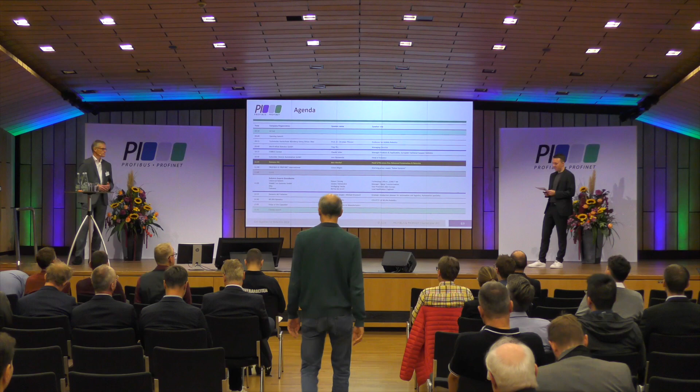Hi. Hi. Here you go.

I'll give you a bit of an overview about the company, about where we are located, which are doing stuff with robotics, doing automation with robotics, integrating that, and then showing you some examples on our product range and also about new possibilities on integration.

So that's basically digital industries, one of the three pillars from Siemens, and it's separated into different business units, such as software, where you also find robotic parts - Tecnomatix, Process Simulate, Plant Simulation. They have a lot to do with robotics, and I think they're quite known to you as well.

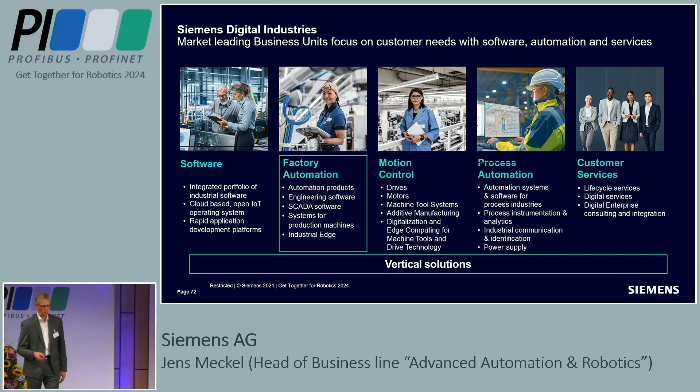So this is an overview about the company, and now I'm digging really deep into my business line. It's a very small business line within factory automation, handling Advanced Automation and Robotics. Our mission is really to make industrial robots smarter and easy to use as an integral part of Siemens technology.

And when I'm saying Siemens technology, that's really meant as connecting to our SIMATIC, the really well-known automation system. Here we see SRCI really as the bridge between the automation, between SIMATIC and robotics. And what our main focus is really tackling the OT customer.

We heard a lot of IT integration changes happening there. Yes, there are a lot of changes, but out there's a huge operation and technology world, and this is what our aim is to address.

As Max said before, my background lies a lot in TIA Portal, and there we have roughly around 200,000 customers using TIA Portal worldwide, and we have millions of machines out there running on TIA Portal based on SIMATIC. That's why, for me, it's a natural step to see how we can leverage that potential we have and make it available also for all the robotics users. This is why I also stated here, integration and of course ease of use is the key.

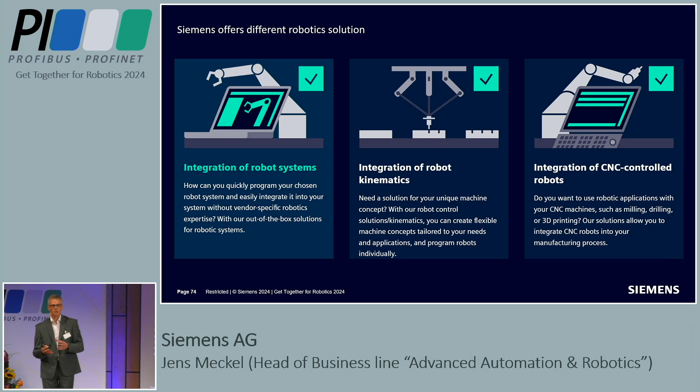So here we're very, very open - we can connect all robot manufacturers using the SRCI interface, and this is really the ease of use for our OT guys. That's why it's so important for us as Siemens to have the robot library, to have the possibility to do the programming and robot movement from within the TIA Portal, and then use the standard robot command interface to connect to the different robots and robot vendors.

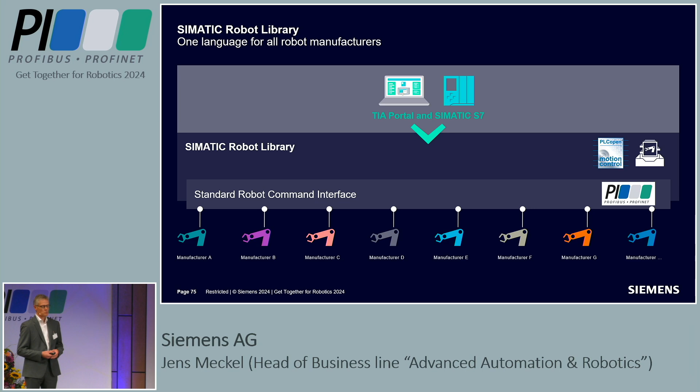And we are increasing the amount of possibilities we have there. First of all, this is the general workflow coming from the TIA Portal with the robot library. You have your predefined HMI screen, which makes it also very easy for our customers to use. And you have your program with the robot library, then you connect via SRCI to the robot.

And not only to the robot - now, released this summer, we also have a simulator which can be plugged into the SRCI interface. And then you can really use the robot simulator to simulate what you've done on the PLC.

You can connect to our virtual PLC, the PLC simulation, PLC Sim Advanced, and then you can really test your program to see if it's running. You can try that without the need of a dedicated simulator from a robot vendor, because here you can connect directly to PLC Sim Advanced, making it easy.

So that is regarding our SRCI portfolio, around the SRCI portfolio.

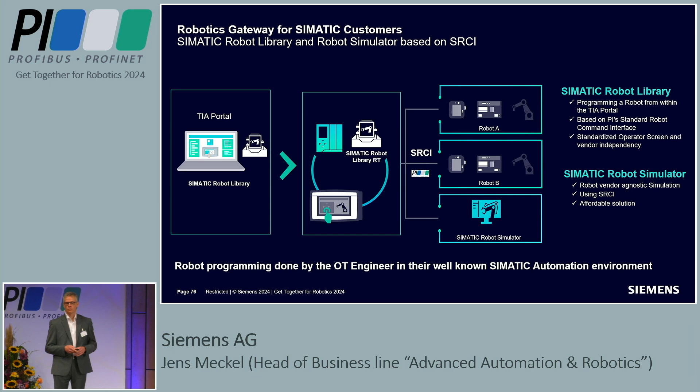But we heard a lot of topics regarding AI-based robotics, and we as Siemens also do a lot of AI-related topics, one of which is in the field of robotics. This comes close to what Ying-Wu showed before from MechMind. We do different kinds of AI-based algorithms in data analytics and things like that, and I will show a system later on, but also in robotics.

In robotics, we were looking for a niche where we could really apply those generic AI algorithms. As you showed before in your presentation, it's bin-to-bin picking of unknown objects. This is a very hard task for robotics, but we have a very good algorithm here, and it's a released product you can deploy, which provides you the pick coordinates.

We will continue within that niche, and what we currently have in development is the so-called Pick AI Pro. We also pick unknown objects, so no training needed, but we'll also have the possibility to do conveyor induction and depalletizing tasks. What we do there is really play in a niche with these kinds of tools - we do not want to disturb the whole market with Siemens coming up with a huge AI-based robotic portfolio. This is for dedicated use cases, and we're really focusing here on intralogistics.

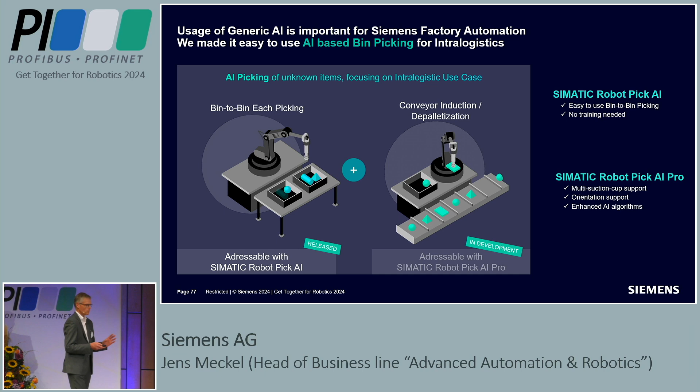Apart from those topics based in my business line, we also came up as Siemens with an industrial edge ecosystem. This is something I really want to show you because from my perspective, it's a huge possibility. Remembering yesterday's presentations about the need of ecosystems, partnering, and collaboration, with our industrial edge ecosystem, this is really what we offer to the market. We want the idea of this to be very open.

So we have customers on the right-hand side, like industrial manufacturers, industrial machine builders, OEMs, and the ecosystem consists of partners. We need application providers because we are not the experts in, for example, optimizing certain process variables of wood cutting machines or things like that. There are application providers and solution providers who have this kind of knowledge.

And for them, we provide the environment, we provide the industrial edge platform to host those kind of applications, to do the marketplace, because it's not easy to install a marketplace in several countries. If you do the cloud-based, you have terms and conditions, it's a real pain, and it's great if somebody takes care of that. And we are the one doing that, and we really offer that to the market, to basically everybody on the market, also on the device builder side.

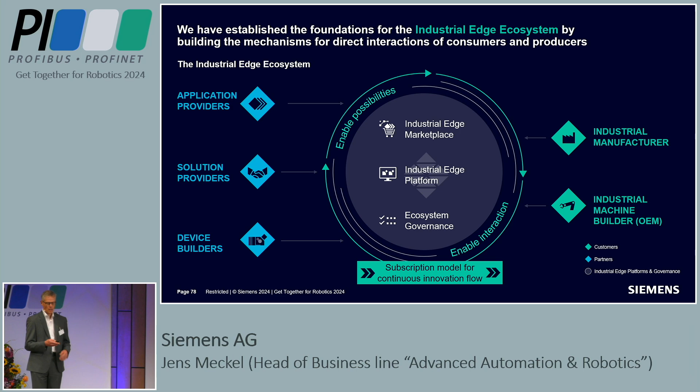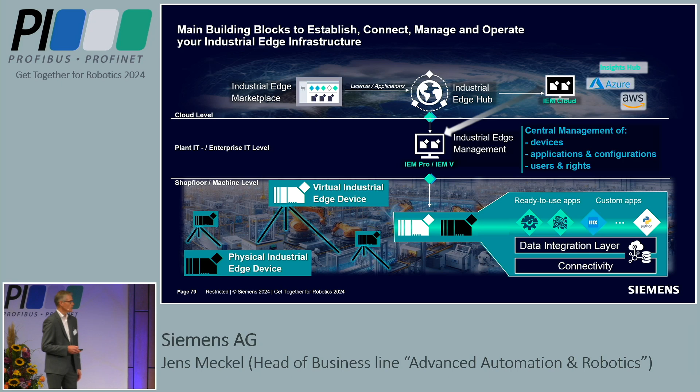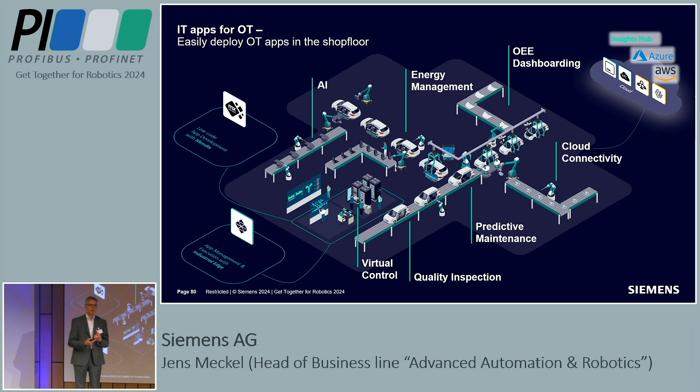And as an example, this is how it could look like if you apply it on the shop floor. So, of course, you have quality inspection topics. You can do predictive maintenance because you get the data from your machinery, so how many hours that was running already, and things like that. And then you get it all centralized and then you can react on that.

And for certain topics, for retraining data, you can also have this cloud connectivity. Very easy, dashboarding, of course, from your whole factory or from more than one factory. And this combined, as I said, energy management, we had it before as well, and the training of AI algorithms, or writing your own low-code applications using Mendix.

So this is something I really want to offer from us, because it's a bit a different approach as we were seen before, from my perspective as Siemens, because here our goal is to be really open. So it's not a Siemens black box, as we heard it yesterday, but it's really open. And this is important because we have no chance to make that only on our own. This will not fly. But if you make it together, I think this can really help everybody in our industry.

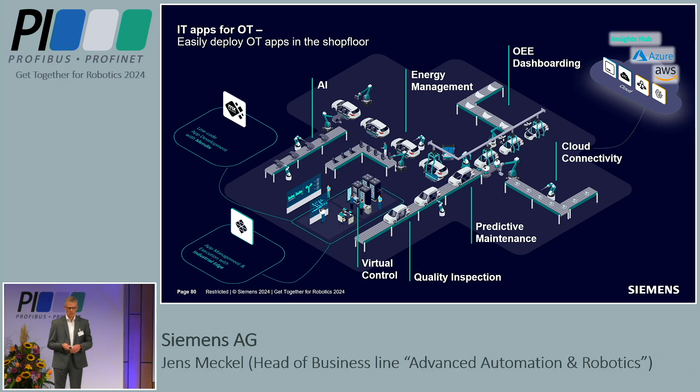So far, coming to your questions. That was what I wanted to tell you. And I just keep that picture on to get your mind a bit mumbling on that. And I'm very happy to discuss that further with you also outside in the breaks or during lunchtime.